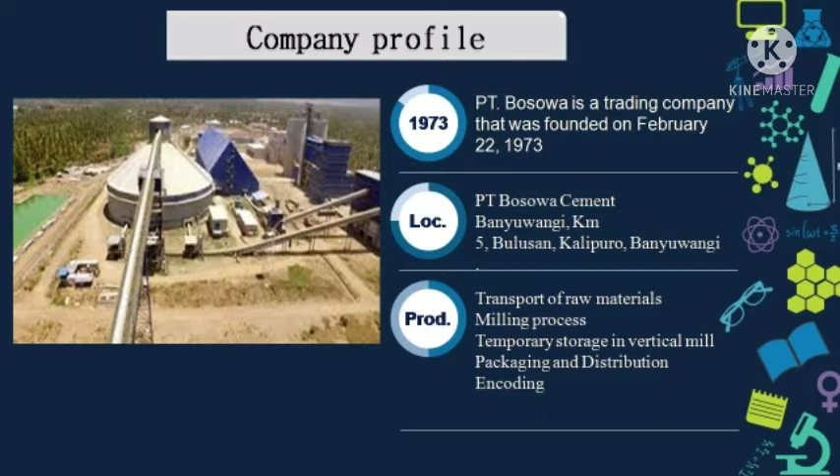Kalipuro, Banyuwangi. The process stages carried out in Bosowa Banyuwangi are transport of raw materials, milling process, temporary storage in vertical mill, packaging and distribution, and encoding.

As for the background of the problem in this research, the cement industry is an industry that plays a role in development in Indonesia. It is undeniable that cement producers from various companies compete with each other to improve the quality of their cement production. The good quality of cement can be seen from several factors, among others its physical and chemical characteristics. Maintaining cement quality is the duty of every cement company.

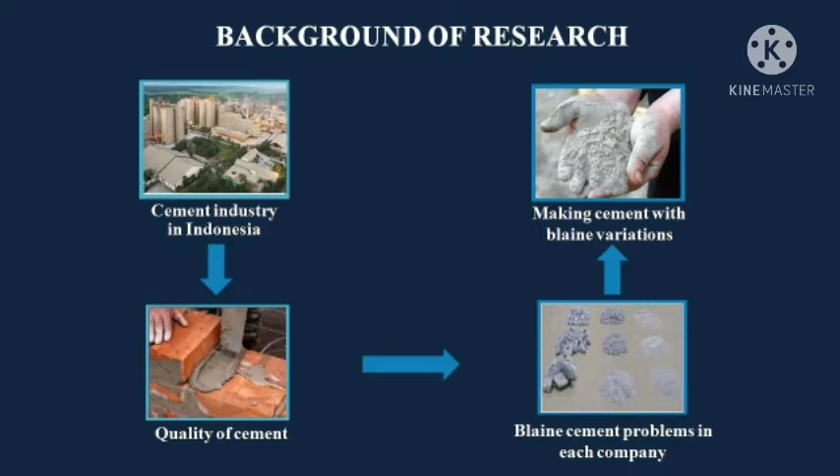One of the problems in each company in terms of physical characteristics is finding the right Blaine value so that the cement used is of good quality. Good quality cement can be determined by testing the setting time and compressive strength. From these problems, research was carried out on the effect of fineness variation 2000, 3000, 4000, and 5000 cm²/g on the setting time and compressive strength of PCC cement, Portland composite cement.

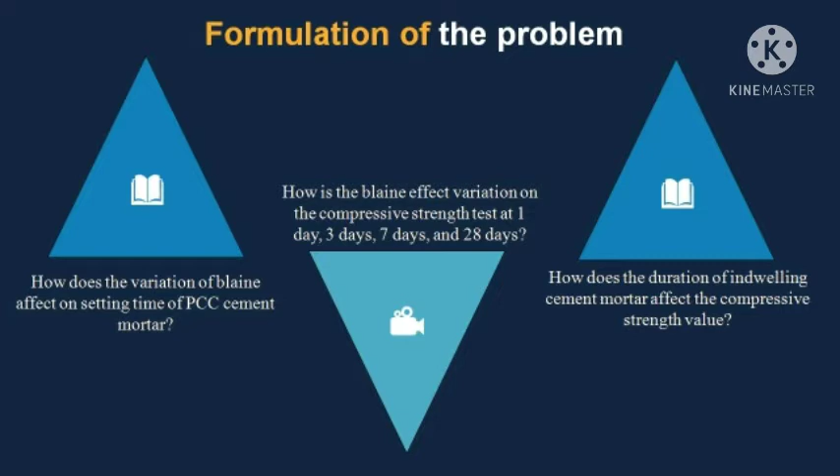From the problems, I formulated three problem formulations. The first is how does the Blaine variation affect the setting time of PCC cement mortar? The second, how does the Blaine variation affect the compressive strength test at 1 day, 3 days, 7 days, and 28 days? And the last is how does the duration of immersing cement mortar affect the compressive strength value?

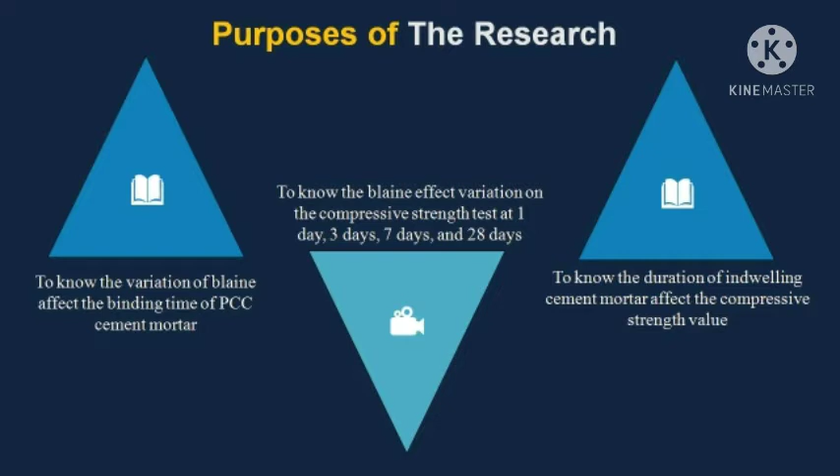In connection with the formulation of the problem, I aim to know the effect of Blaine variation on the setting time of PCC cement mortar, to know the effect of Blaine variation on the PCC cement mortar compressive strength test at 1 day, 3 days, 7 days, and 28 days, and lastly, to know the effect of the duration of immersing cement mortar on the compressive strength value.

Then, I use the theoretical basis associated with my research. Cement is a mixture of several chemical compounds that are hydraulic. Cement also has adhesive and cohesive properties, which can form new compounds when reacted with water.

The definition of Portland composite cement according to SNI 15-7064-2014 is a hydraulic binder resulting from grinding together Portland cement slag and gypsum with one or more inorganic materials, or the result of mixing Portland cement powder with other inorganic powder.

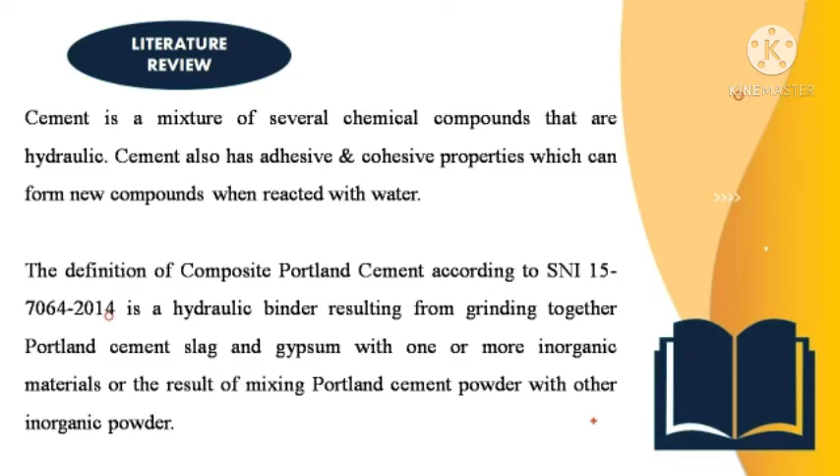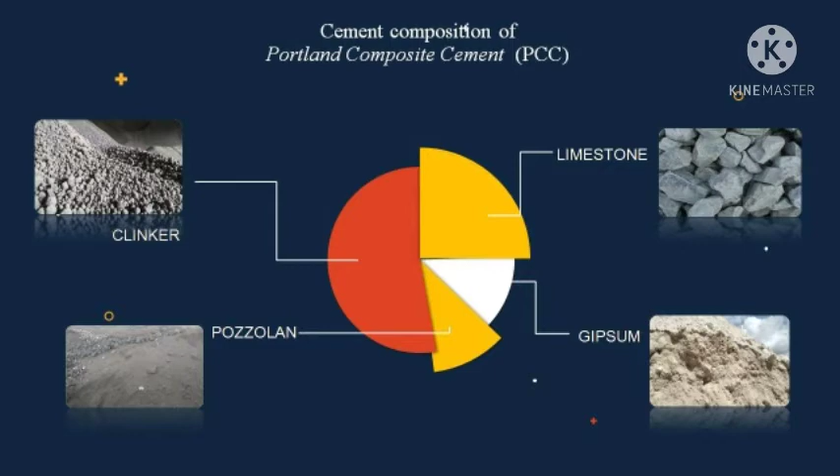Pozzolan is a material that contains alumina and silica and functions as a compressive strength enhancer. The next is limestone. Limestone is a material that contains calcium carbonate. And last, gypsum. Gypsum is a material with the chemical compound calcium sulfate dihydrate. Gypsum is divided into two types, namely natural and synthetic.

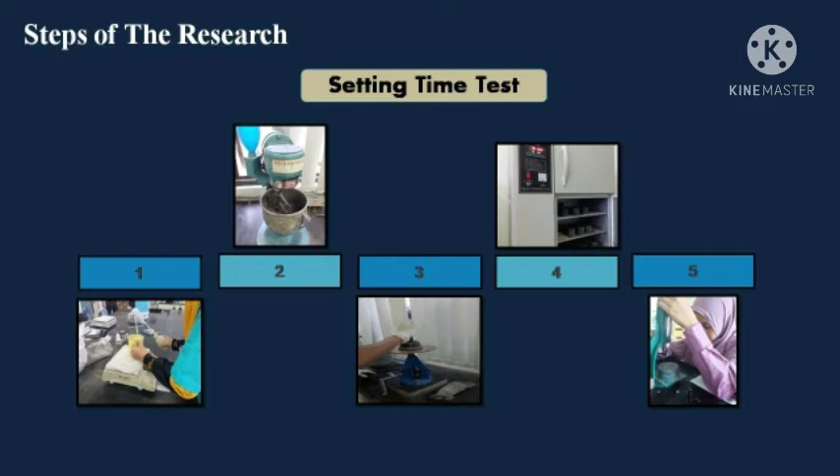In this research, there are two stages of testing. The first is the setting time test. In the setting time test, there are 5 steps, including weighing water and cement according to the specific portion, making cement paste with a cement mixer, determining normal consistency using a flow table, hardening the cement in a wet box, and testing setting time using a Vicat tool.

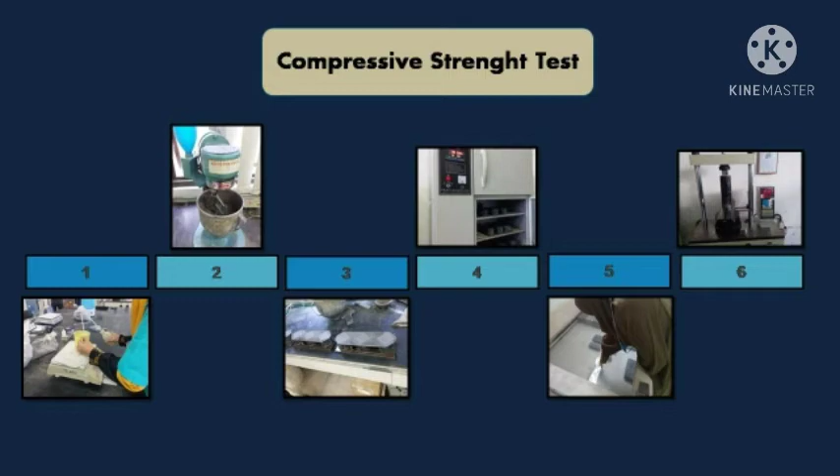And the second is the compressive strength test with 6 stages, including weighing water, cement, and silica sand according to the specific portion, making mortar with a cement mixer, printing cement mortar, hardening the cement in a wet box, and testing the compressive strength using a compressive strength tool. Next is results and discussion.

The Blaine of cement grains is called the specific surface area, namely the larger surface area of cement particles, which will enlarge the contact area with water so that it accelerates the hydration process. The first test is the determination of the setting time. It can be seen in the table. There are two lines with different colors. The first line, blue, shows the result of the initial time, while the red line shows the final time.

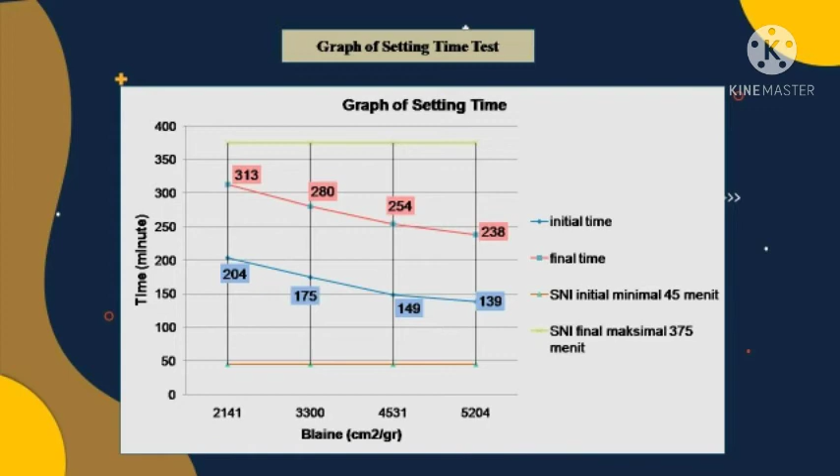The two lines show a graph decrease from the lowest value to the highest Blaine. This explains that the higher the Blaine value, the faster the time it takes for cement to bind to water. As previously explained, the finer the cement particles, the faster the cement hydrates with the water.

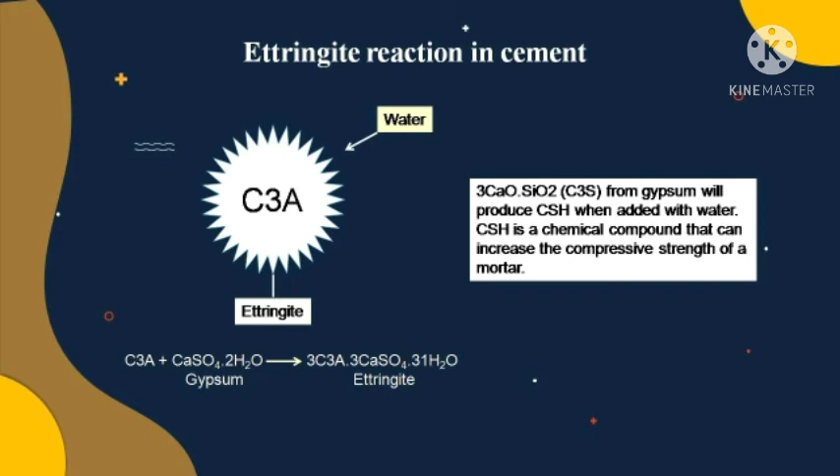As for the reaction that occurs when water reacts with a mixture of tricalcium aluminate from clinker with calcium sulfate hydrate from gypsum, it will form a new compound in the form of tricalcium aluminate, 3 calcium sulfate, 31 hydrate, commonly called ettringite. So the finer the cement particles, the faster the water reacts with the compound content. And the next test is the Blaine effect on compressive strength.

From the graphical data obtained, there are 4 lines with different colors showing the value of smoothness and test age against compressive strength. Namely, the blue line shows the compressive strength value for Blaine 2141, the green line Blaine 3300, the yellow line Blaine 4531, and the red one with a Blaine value of 5204 centimeters quadrat over grams.

For each Blaine, with age, the graph increases. One of them is Blaine 2141 centimeters quadrat over grams. At 1 day, the compressive strength value obtained is 13 kilograms over centimeters quadrat. 3 days obtains 40 kilograms over centimeters quadrat. 7 days obtains 68 kilograms over centimeters quadrat. And at the age of 28 days, 107 kilograms over centimeters quadrat.

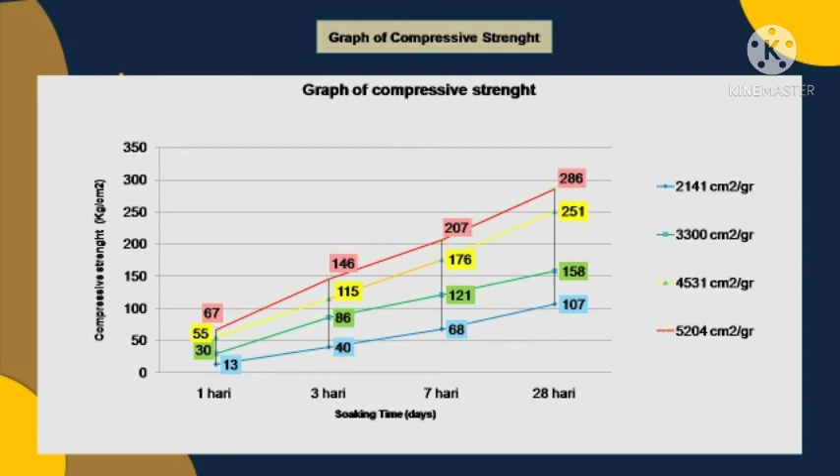From the research that has been done with 3 problem formulations, it can be concluded that the higher the Blaine value, the faster the cement setting time. Second, the higher Blaine value will increase the cement compressive strength. Lastly, the longer immersion will increase compressive strength.